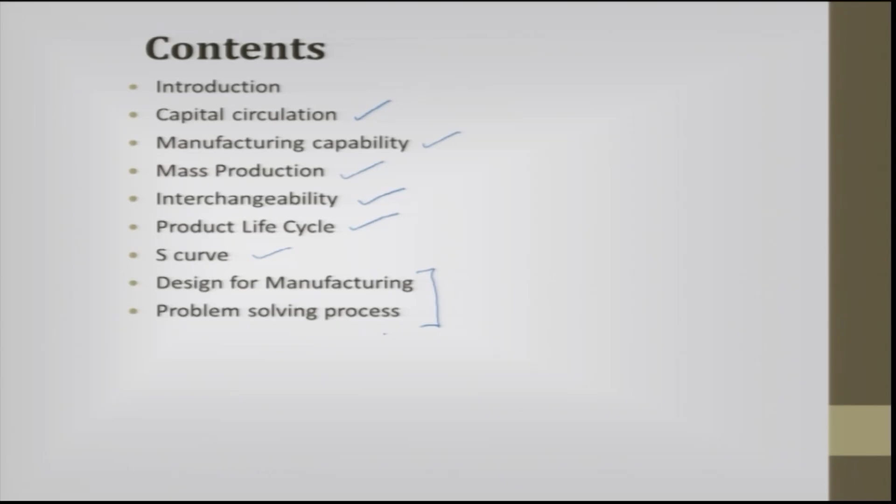So we are left with two more topics to be discussed. One is design for manufacturing, and the last one is problem solving processes.

Here we would first look into simultaneous or concurrent engineering. What is concurrent? Concurrent means involving many people together, working with the latest technology or the recent happenings. When you talk about any product, there are two primary criteria a product designer must always keep in mind: the functionality, and the performance.

A designer must ideally deal with various market limitations such as the current technology. There are several places where even current technology has a lot of limitations. For example, when we try to use GPS, we say it is very good, but still we have problems when there is zero visibility on the airstrip. So takeoff and landing is always a problem, yet we still need the technology.

Current technology has a lot of limitations for the processing of material. When we talk about processing of material, there are materials today which are brittle, and also high strength and brittle, with a lot of fracture toughness. So you have combinational mechanical properties, and when we start processing those things, we have a lot of limitation in manufacturing technology.

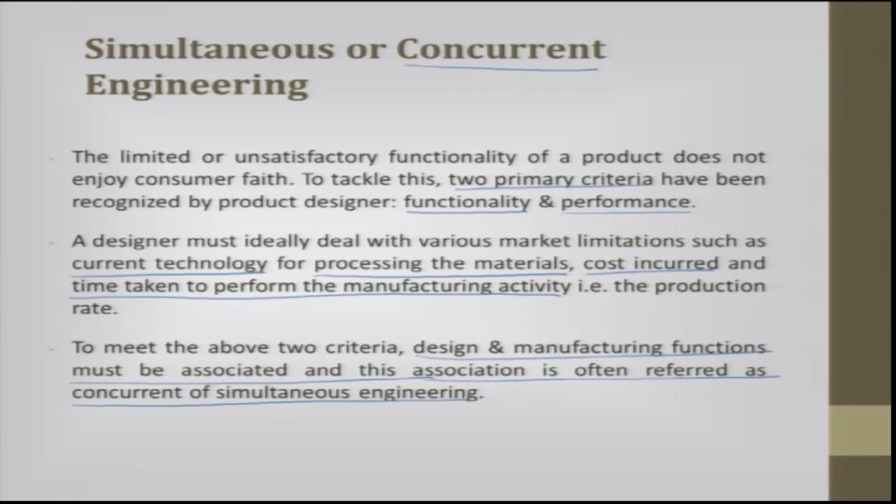This means you have a team with many members who participate when a product is getting developed. Here we have just taken an example of a manufacturing engineer, but we can also have materials personnel, a shipping engineer, a goods inward engineer. All these people sit together with a common objective - to produce a product which meets all the functionality and does a wonderful performance. This is called concurrent engineering.

There can be a technology limitation, a material limitation, a cost limitation - that is, the cost which can be given to a particular product. So all these people sit together and look forward to developing a product, and this is also very important when a product is getting designed. The product engineer must keep this in the back of his mind.

The design of a product is based on concurrent integration of major activities: design conceptualization and design axioms, identification of product functions, product modeling and CAD, material selection, design for efficient manufacturing, and specification of dimension and tolerance for selecting proper machines. All these are part of concurrent engineering, also called simultaneous engineering.

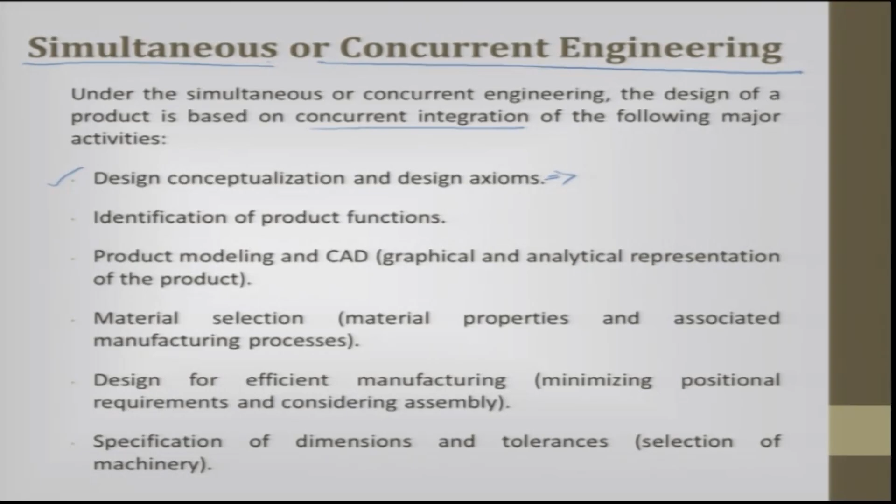When we develop a new product, we should keep in mind that we follow concurrent engineering. These arrows represent the aspects I've given in the next slide, including design for manufacturing, which I have already hinted earlier. I will quickly walk through the slide.

The ultimate aim of a product designer is to design a product that is coherent with user expectation over the life cycle of the product and has good resale value. This is an important thing a product designer should think about at the design stage.

DFM is a concept which includes careful and organized study of various issues and mandates integration of all relevant data. So design for manufacturing concept is much more than just manufacturing. It is an effective collaboration of user and market expectation, processes, various assemblies, disassembling methods, considering socio-economical factors and maintenance requirement. This is very important.

DFM concept is much more than just manufacturing. It is an effective collaboration of user and market expectation, processes, various assemblies, and disassembly.

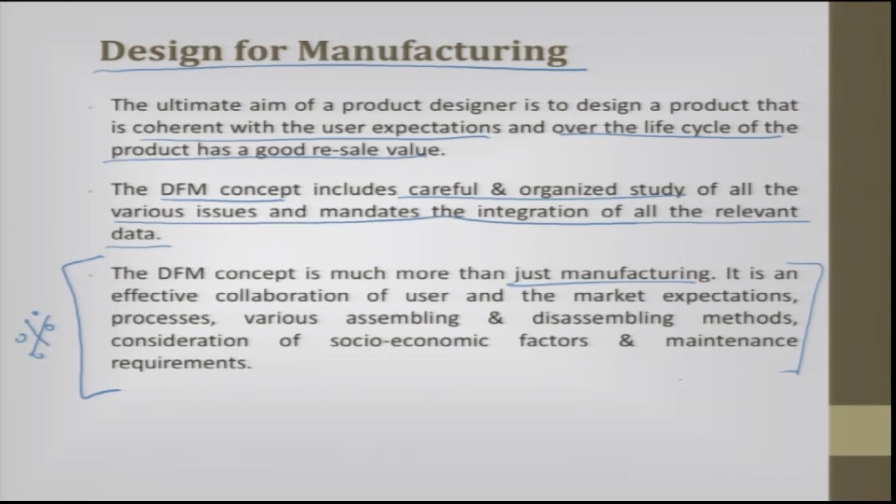Let me take an example of a simple table, say a study table. It has 4 legs and a top. Let us take the top as 1 piece and the legs as another piece, so 2 into 4 pieces you have.

If you completely make a table in your factory and try to transport it to the customer, it occupies a lot of volume and space.

So what people have come out with is something called design for manufacturing. They try to sell a table as disassembled parts. Now, with the same given space, the table is divided into pieces and packed separately, so it can be moved from manufacturer to customer without getting damaged, and the customer is asked to assemble it rather than buying an assembled table.

So this is part of DFM. Keeping concurrent engineering in mind, they realize transportation would be costly for this table, so they sell it disassembled and ask the customer to assemble it, with a user manual that is more pictorial, so just by looking at it the customer understands what has to be done and does it himself.

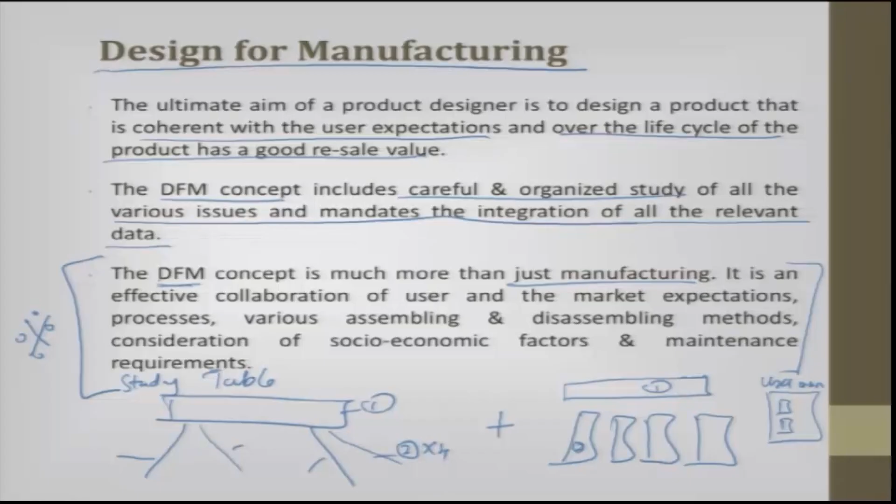When we talk about design for manufacturing in more detail, the major activities include marketing, good choice of design principles, concept design for reference, recognizing materials and processes, design process analysis and rectification, quality expectation, analysis of assembly and disassembly method, engineering models, and detail engineering.

Here, the boundary conditions are such that the initial concept idea is approved and functionality is all integrated into it. Now they look at fixing the boundary conditions, look for simulation or optimization in terms of space, cost, whatever it is, and then come out with a detailed engineering design. Until this conceptual idea stage, you don't worry about what should be the size or shape and so on.

You just put all the functionality together and then integrate it and look at it, okay, this is what is a product we are supposed to make.

Once everything is cleared by the customer, then you start optimizing and reducing space, choice of material and all those things. Economic analysis and production cost estimation is very, very important, as a product is always developed keeping economics into it.

Prototype development, engineering testing and redesign - this is an iterative process. Product development is never a single step process. It is iterative. It goes back and then you reiterate, come back again and then show it to the customer and then improvise your product.

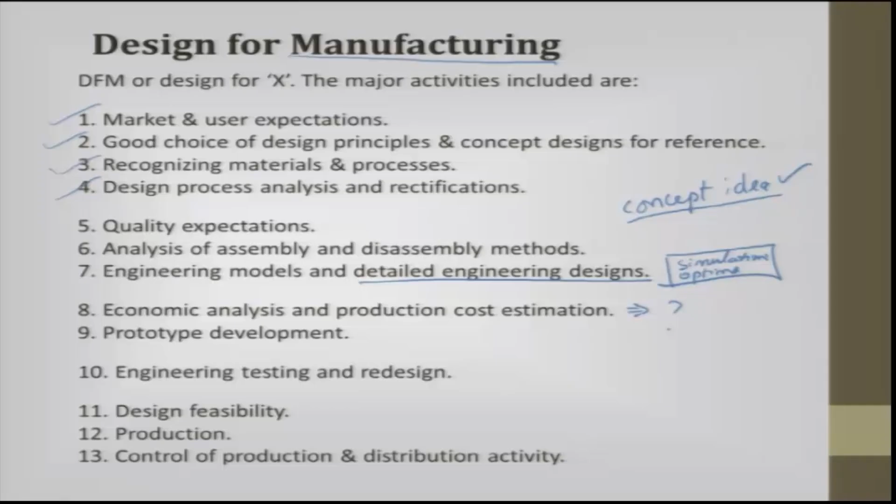Design feasibility, production and control of production and distribution activities - these are some of the major activities for design for manufacturing. If a company says they are following design for manufacturing, that means to say they have done a thorough job in the product design stage itself to develop a product. And if a company follows this design for manufacturing, it is pretty sure their product is going to be sustainable, the product is going to be of high quality, and the costing to a large extent is reduced.

The last topic in this lecture is the engineering problem solving process. The basic engineering problem solving process outlined by Krick has 5 steps. First, you have to formulate a problem. Second, you have to analyze the problem. Third, you have to look for alternative solutions. Fourth, among the alternative solutions, find the best solution and start working on it. Finally, you choose the best solution - these are the specification of the solution.

Now let us take an example. I feel it is pretty cold outside, so now I have to decide how should I protect myself from the cold. And the other thing is I am also moving, so buying a heater is not the solution. So I have decided that I will buy a protecting cloth which can cover my body, wrap around my body.

So then it comes as, should I buy a jacket, should I buy a sweater. Now I have to decide which one to buy. Next is, what is the color, and next is, what is the cost. Then, should I think for cost, and then should I buy it immediately or should I postpone it for a week. So these are all statements in front of me.

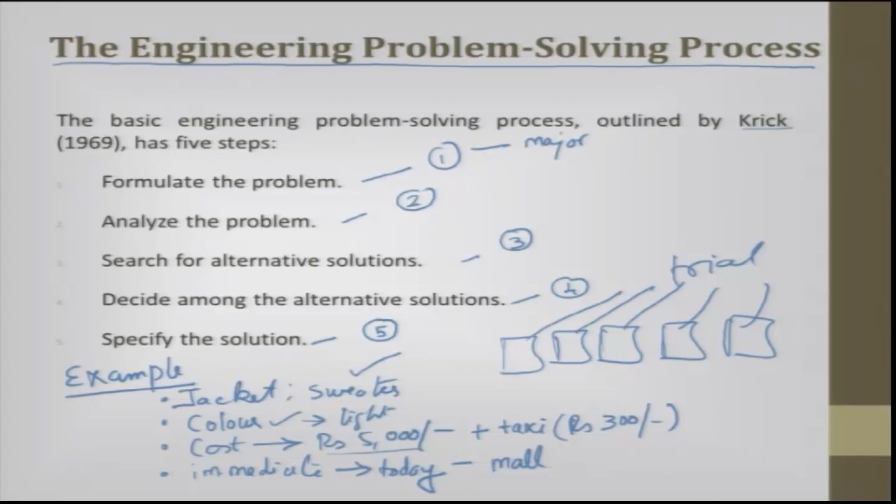The engineering problem solving technique also goes by this, but this is the major challenge - how do I understand the situation and formulate a problem? This is very, very important. A good problem solver engineer must determine whether or not the problem is worth solving.

Many times you try to solve a problem which is only one time and rarest of the rare kind. Then you cannot develop a product for it, you just have to live with it and get out. Please do not look at those things, look at problems where it is genuine and occurring regularly, where many customers are affected.

First you have to choose a problem exactly. If you choose a small problem, then a product designer might develop a product which does not have a long product life, or the number of products sold will be very less.

Next, quantitative and qualitative information should be gathered for exhaustive understanding of the problem and its challenges. What is qualitative and quantitative? Qualitative is soft, hard, high strength, but you do not give any values. When you talk about quality, these are all qualities, but when you talk quantitative, you try to give a number to it. So quantitative and qualitative information should be gathered first, then you look at the problem challenge.

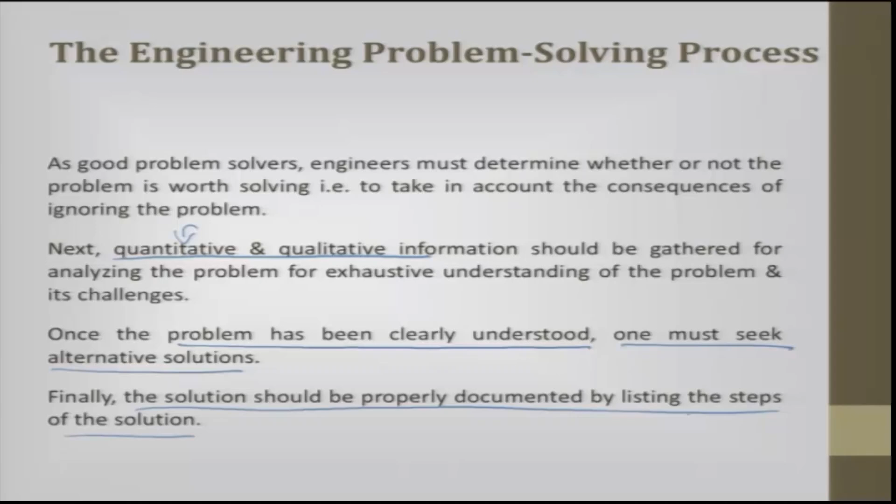Finally, the solution should be properly documented by listing the steps of the solution. A product designer should always keep a diary, whether hard copy or digital, recording information and making notes, regularly iterating the notes so that he converts data into information, and this information is recorded so that whenever he needs clarification, he can go back to it.

Going back and forth, he should finally write down the systematic solution, how he arrived at this particular end product, why he chose this particular shape and size, what is the logic behind it. This has to be properly documented.

This will help him henceforth, so that he need not start right from scratch. He can use this information and then start proceeding further.

So with this we come to an end of lecture 2. Till now we have covered the basics of product design and different manufacturing concepts involved, keeping product design as the back end. Thank you very much.